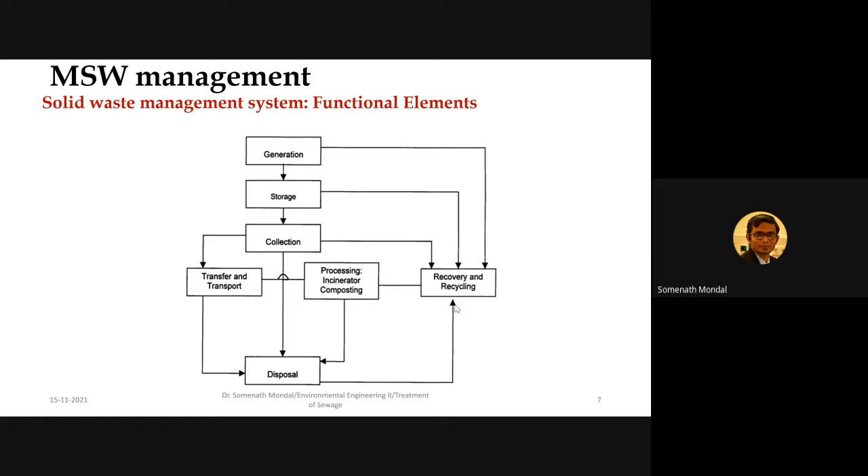Just 1 second, hold on for 1 second. Hello. Good morning.

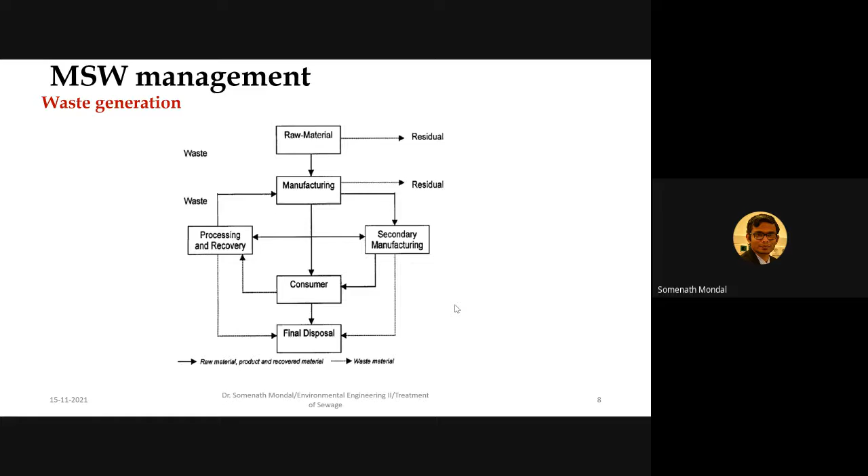So mostly if you see, we have food waste and paper, and depending upon, sometimes we can have some amount of cardboard, and then the next one which we can get in more percentage is garden trimmings. So that is also organic, we would say. Next comes, in few cases you will have glass materials and tin cans, or tetra pak

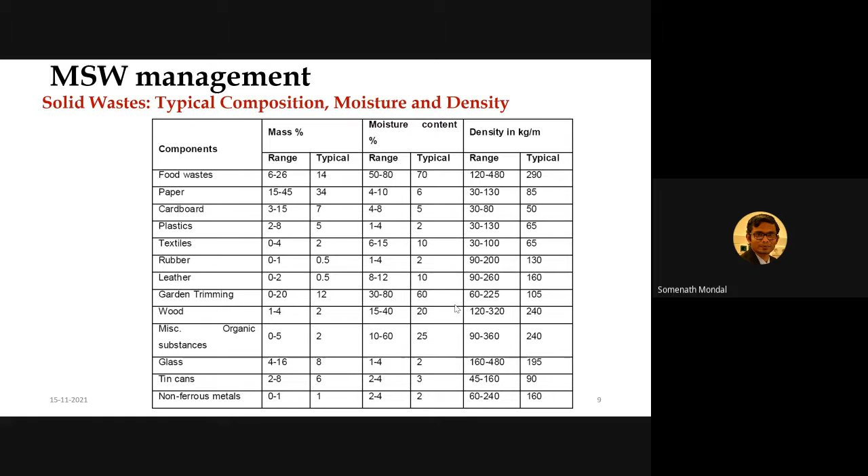cans, or non-ferrous material. These days the percentage of plastics is increasing at an alarming rate, which needs to be considered, and which needs to be reduced to practice sustainable engineering. So I am showing this table to have a good idea about what are the compositions associated with Indian municipal solid waste.

Now we'll be talking about the storage of the solid waste and how this procedure is done. So why is municipal solid waste storage important? Because if you see, there is a significant time lag between the generation of the waste and processing of the waste. So within that, if you don't have proper facilities to store that solid waste, then that will have several detrimental impacts on the environment. And to reduce that, or to avoid that, we should have proper solid waste storage facilities.

presence of biodegradable material. So we have putrescible material, and if you keep it more than 2 days at your home, you know how unpleasant the smell can be, it can stink very badly. So you cannot stay at your home. So that is why we should have some facilities to store that. On-site storage is of primary importance due to aesthetic consideration, public health, and economics involved.

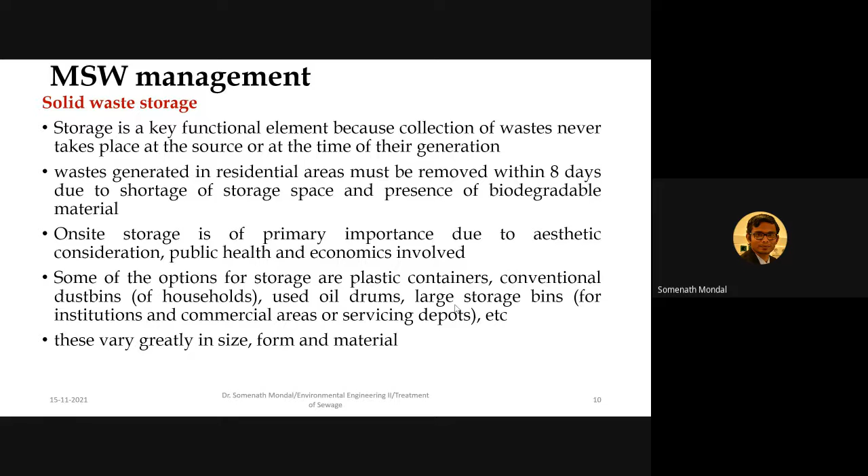So go to the next page. So we have solid waste storage facilities, we have containers and storage bins. Storage bins can be of two types. One is stationary containers. These are the containers which are used for contents to be transferred to the collection vehicle at the site of the storage itself. And then we have hauled containers.

So these communal containers are filled, and then once a compactor collection vehicle comes, the communal container can be lifted up and emptied mechanically. Fine. Now the use of communal containers largely depends upon the local culture, tradition, and attitude towards the waste. And communal containers may be fixed in the ground, or they can be movable sometimes.

And movable containers are provided with hoists and tails compatible with the lifting mechanism, so that the municipal vehicle can directly come and lift up those containers, and they can drop another empty container. Usually these communal containers will have capacities of 1 to 4 cubic meters, and the waste management authority must monitor, maintain, and upgrade the communal containers.

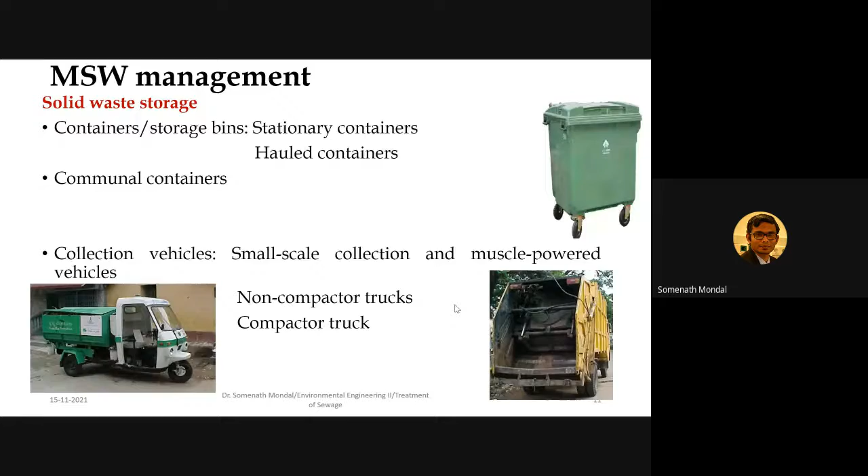Now the next point is solid waste collection. This is also the next important part, so we'll be discussing it. So first, the main point is the collection points. Once waste is taken out from the domestic area or the household, it will go to the collection points. And from collection points, we next need to see the collection frequency. That means how many times in a day the vehicle will come to collect the solid waste which has been accumulated in that collection point.

And next comes the storage containers, which we discussed just now: how much would be the capacity, how much it will be able to take. And then comes the collection crew. Depending upon the storage containers, the collection frequency, the quantity of collection points and the amount of waste generated, we need to see how many collection crew are required. Once we chalk that out, next we need to see the route by which we'll do the collection procedures. Effective routing is very important for the overall economy of municipal solid waste management projects, so chalking out the effective collection route is very important.

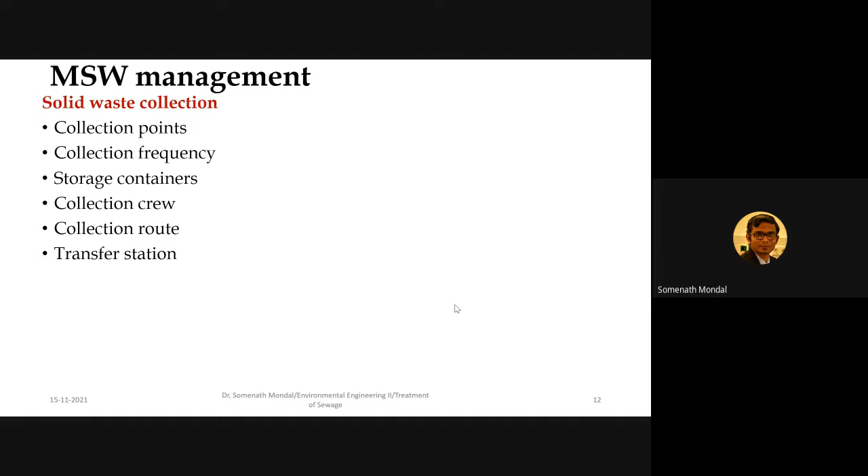You can see that. Now, so basically we have gathering of waste and hauling them to the location where the collection vehicle is emptied, and that may be a transfer station or intermediate station where wastes from smaller vehicles are transferred to the larger ones, and also segregated, a processing plant or a disposal plant. So these are the steps.

Now collection depends on a number of containers, frequency of collection, types of collection services and routes, which I mentioned before. Next is, collection is provided under various management arrangements, ranging from municipal services to franchised services and under various forms of contracts. So you have the municipality, and then under the head of the municipality you may have some contractors and subcontractors who can be involved in the overall activity of solid waste management.

Next comes what are the different vehicles which are to be used for long distance hauling, and that may be particularly not suitable for house to house collection. However, they can be used for long distance hauling. Every solid waste management system therefore requires an individual solution to its waste collection problem. This is a very important statement, needs to be kept in your mind.

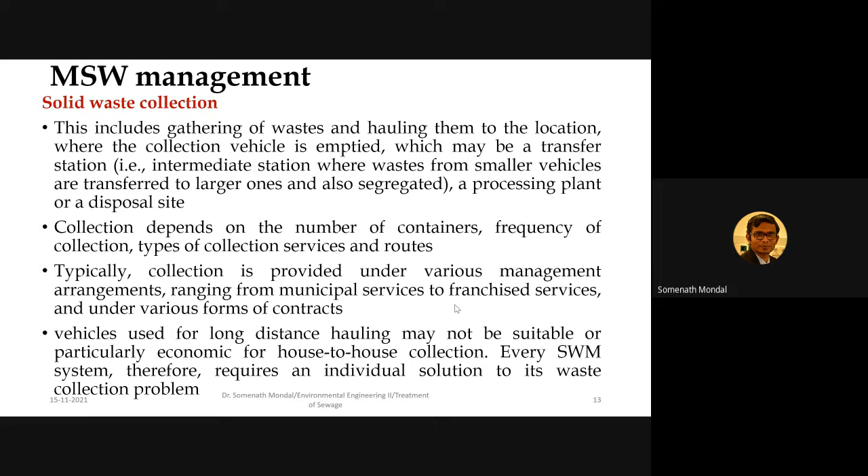So there are no sacrosanct provisions by which you can manage the solid waste, because if you change the geography, locations, the people, then the weather and other things get altered, and that is why the municipal solid waste management system also gets changed or gets influenced. And that is why you need to develop a required solution for the waste collection problems at your locality or the area where you have been given the responsibility. So this is very important to remember.

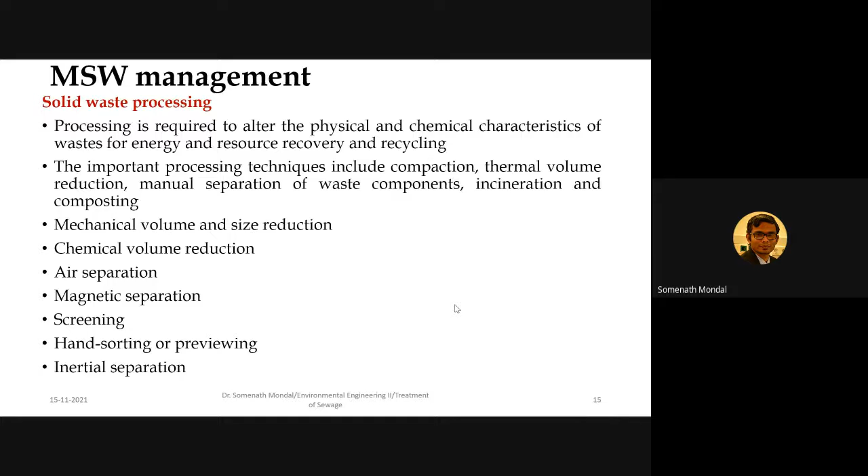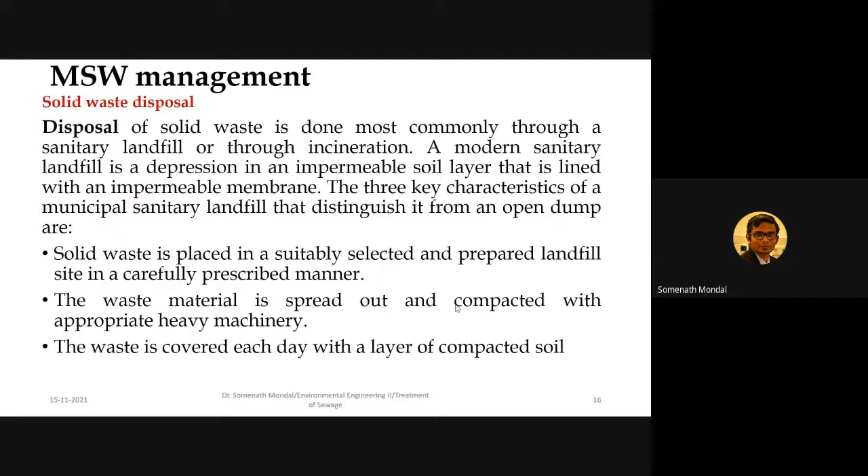Next, another aspect, that is the disposal of solid waste. But disposal of solid waste will take some time, so maybe these two I'll finish in the next class. So if you see, just let me